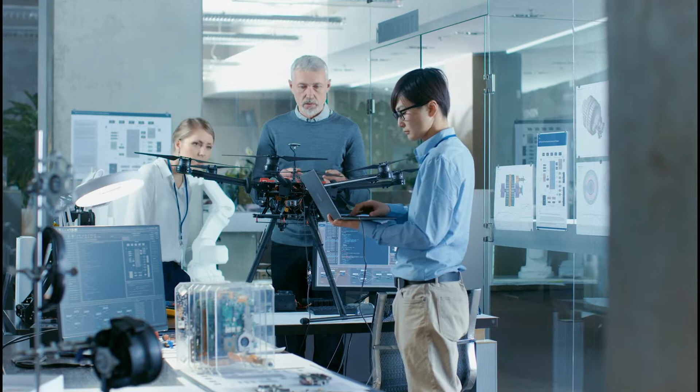We've had a lot of challenges in this technology space, and the aerodynamic challenges that we encountered is where Simcenter STAR-CCM+ really helped. We have an externally driven propeller design, so all of the motors are on the outside, all of the controls are on the outside, and we needed to find a duct that covered that for aerodynamic reasons.

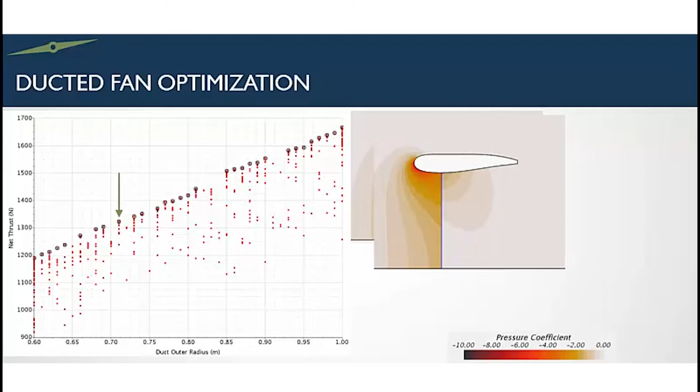Simcenter STAR-CCM+ was able to not only cover it, but also actually increase our thrust by about 8% for our design. So that was really huge because we're trying to create as much thrust as possible in the smallest disc area that we can get. Because this is going to personal flying devices, think about Joby aircraft and all these Uber air taxi types that everyone is using. It's for that type of application.

Well, if I didn't have access to the CFD products, the alternative would have been trial and error. We really just didn't have the expertise in-house. We really didn't have the capabilities of software, hardware, until we had access to the Simcenter STAR-CCM+ software, and especially the Siemens analysts that helped us through our challenges for aerodynamics.

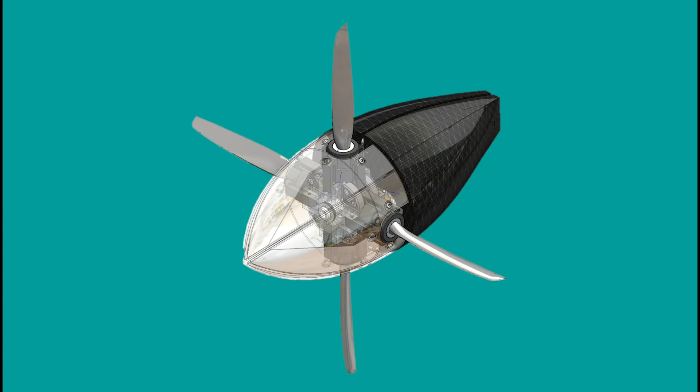The analyst, Peter Burns, and the capabilities that Simcenter STAR-CCM+ had were able to look at variables that I didn't really think about. And so we ended up with a much better design than if they had just solved the problem that I originally asked them to do. The final duct design is completely different than what we started out with.

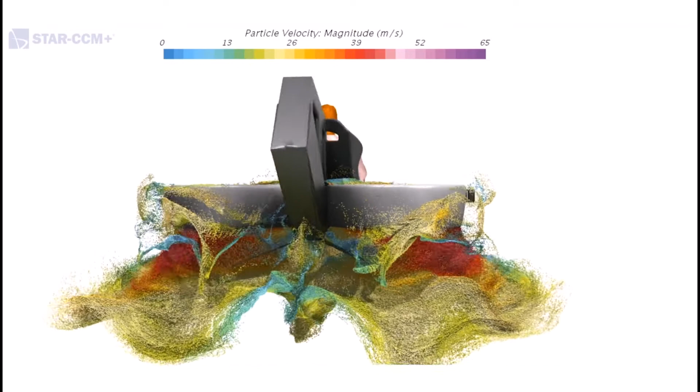And after running the simulations, what we found was that the duct design that the optimizer, Design Manager from Simcenter STAR-CCM+, came up with, with all the parameters that we gave them, was 8% more thrust out of the same disc area.

So it was pretty amazing how many different combinations, and not just for the size radius that we asked them for, but they were able to run something like 250 different simulations and give me different duct designs for different radiuses, because we were trying to hit a very small area for the Boeing GoFly competition, and really couldn't have achieved it unless we had this great help from the Siemens team.

Siemens reaching out to startup companies like us where we wouldn't have access to this. That, to me, is what fellowship really is like.